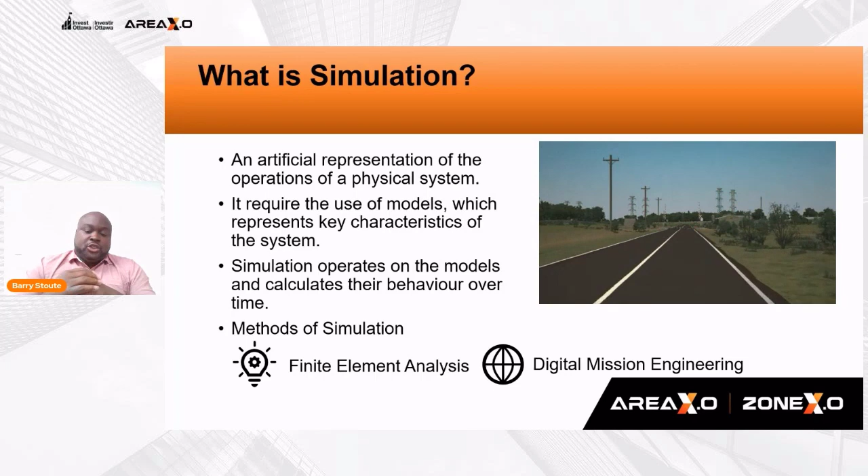So what is finite element analysis? Finite element analysis, or FEA, is a numerical technique to solve physics models. I'll provide a high-level explanation as this area is quite complex.

It starts with a digital model. It could be any model from CAD, such as ANSYS SpaceClaim, AutoCAD 360, Fusion 360, SolidWorks, and so forth. And it's paired with a numerical solver, which in this case will be ANSYS.

The numerical solver solves for several inputs, such as boundary conditions, initial conditions, and environmental conditions—anything you put as constraints into the model. Then the two are computed, and the computer solves the equations and outputs the data.

Finite element analysis solves for mechanical structures, thermal analysis, electronics, and optical. You're asking yourself, so why is it called finite element analysis?

Finite element really means that we're taking a model, let's say this patch antenna, and creating a mesh of it, breaking it down into different elements. Each of the elements is solved into a large matrix—it could be thousands or tens of thousands of rows and columns. Therefore, this is called finite element analysis.

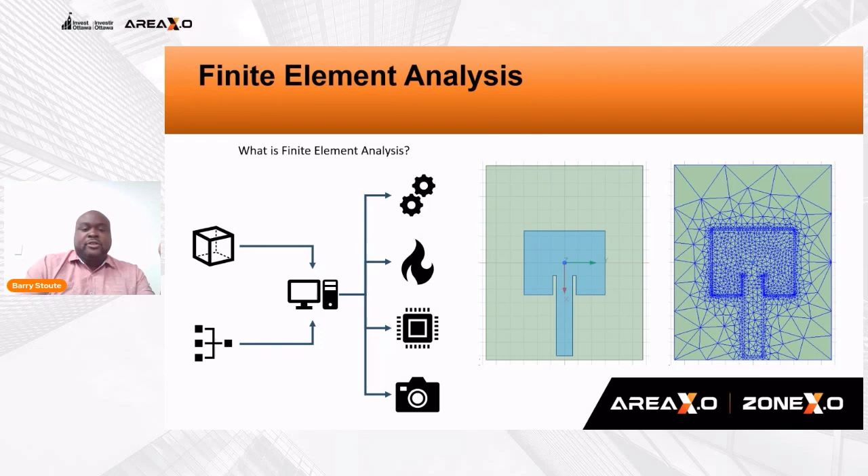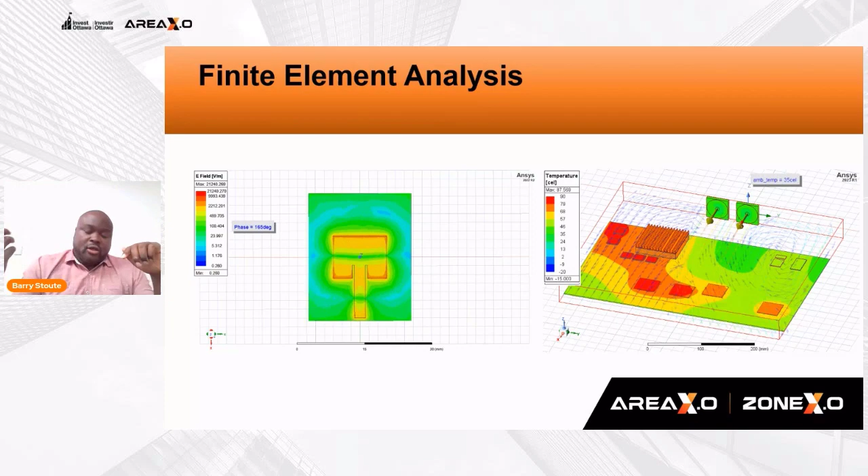After the finite element analysis software finishes running, the results are illustrated for engineers to analyze the behavior of the system. The illustration could be two-dimensional, like this electromagnetic radiation result from this patch antenna, or from the thermal analysis of this server, which is three-dimensional.

Next, we're going to go into digital mission engineering, or simulation that does systems of systems. In digital mission engineering, we start by having an engineer think about a scenario anywhere around the world. Thereafter, he puts in his asset, which could be a drone, a satellite, a car, an aircraft, or anything like that. For our purpose, we'll put in the drone.

This asset will perform duties like intelligence gathering, and will spy over or interact with an aircraft, a boat, a car—but it doesn't have to be adversarial. It could be a piece of land or a city. That asset will also have some allies in this case.

It could be a SATCOM to communicate its data, and a ground station. Now, this is just a unique scenario. It could be any scenario that the digital mission engineer wants, as long as it's grounded in real-world aspects.

Moving on, so we have our scenario. Then the simulation engineer will put in the inputs, such as time of day, route, sensor types, and so forth. The output will be data. That data comes to the engineer, who analyzes it to make sure it makes sense—not just common sense, but also physics and scientific sense.

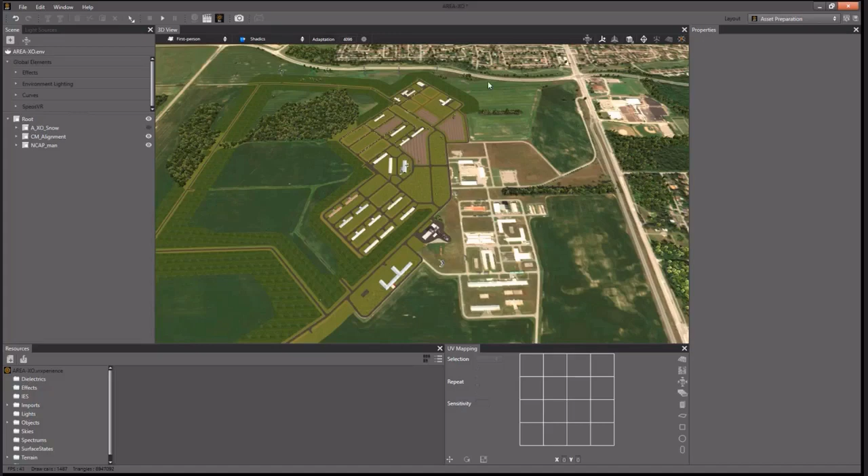What we have done at AreaX.O is digitized the entire site into the ANSYS platform. Right over here, you can kind of see what this looks like. The model includes our entire site with all of its different zones, as well as the infrastructure. Zooming in, we're able to see a lot of the finer details that are included in this model.

We have our main building where most of our staff is located, as well as all the traffic signs, nature, and other infrastructure that has been set up, as well as the farms. This digital twin also includes the infrastructure embedded into our smart city zone.

This includes a multitude of sensors, which have optical cameras, roadside units. Right over here, we also have some thermal cameras, as well as LiDAR cameras. These sensors, as well as multiple more, are embedded into our site where they're physically located to mimic the real-world scenarios in the simulation before we actually go to conduct our tests.

As we were mentioning, the site is extensive, including all the road markings and other small features, as well as our railway crossing. So that can be also observed here. And we're able to simulate the arms moving down and up as would be normal in our typical use case.

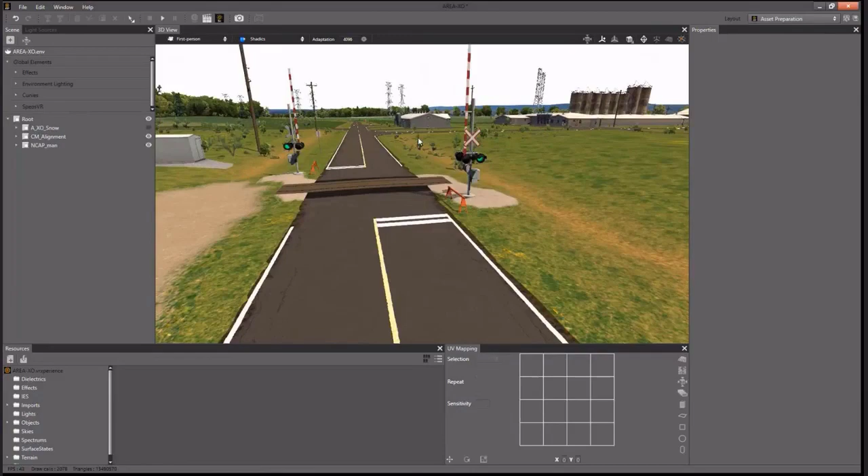In addition to this, the model has also been allowed for easy adjustment of different weather conditions, which includes fog as well as snow, which is one of my personal favorites. Here we'll give you a teaser of what that looks like. So yeah, it allows you to test in different weather and lighting conditions, at night, day, you name it, without actually having to wait for those scenarios in real life.

Now that we have a decent idea of the environment that we're simulating in, we can move on to defining the sensors on our vehicles. So the different sensors that we are able to simulate are shown here. We're able to simulate cameras, LiDARs, including flash and rotating, as well as radars.

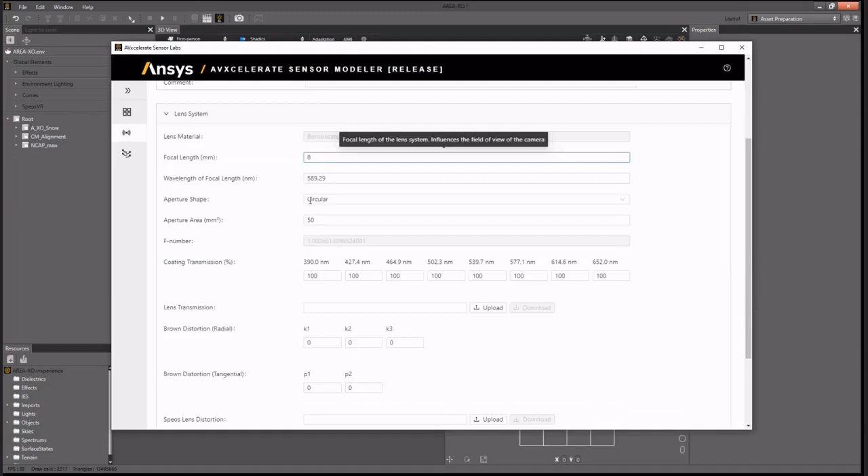For a quick demo, I'm only going to be presenting the data from the camera, because the LiDAR and radar require additional interpretation. When we go to define our camera, we're able to define all of its physical properties as shown here, and all of this results, it allows for the ANSYS simulation platform to compute the physics behind what is going on.

So once we have our sensor defined for whatever we chose, we're able to define our test vehicle and define where the camera or other sensor is located on the car. For this demo, we'll just use a demo car, just the Lexus, and the camera is going to be located right at the front of the car. Not the most realistic, but this will let us have a good and clear view of what's going on in the environment.

So once we have our car defined as well as the sensors on the vehicle, we are able to move on to choosing a car simulator. Currently, we support a lot of different software. We're able to run simulations using IPG CarMaker, Carla, and also using Webots.

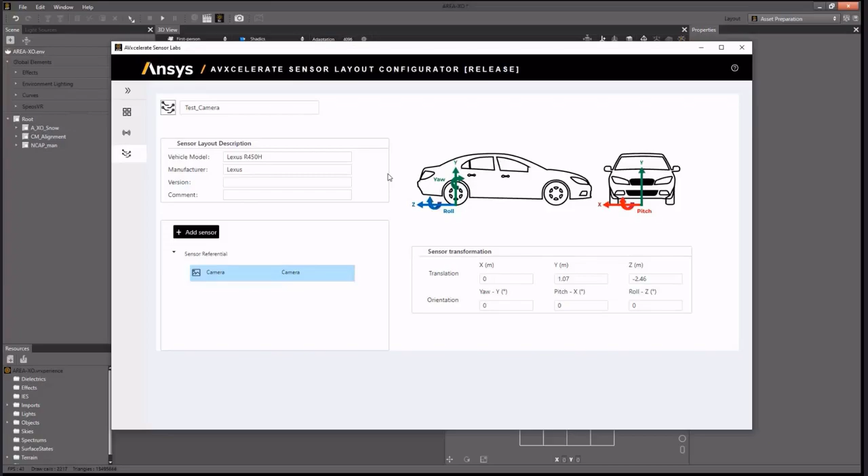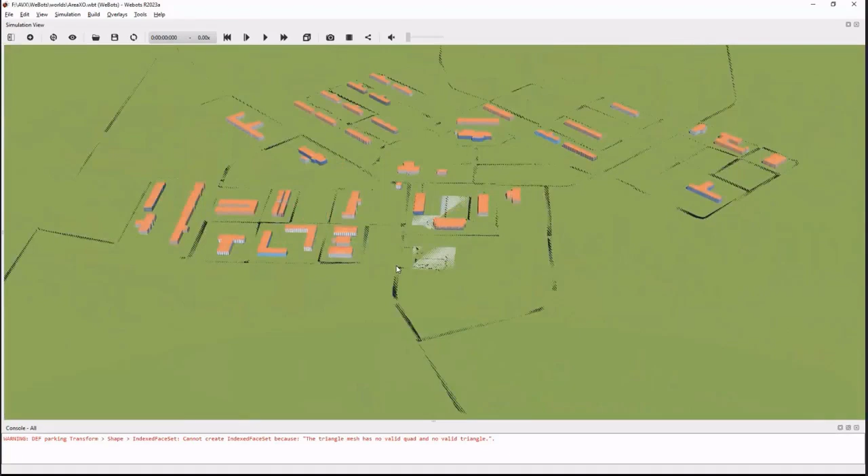So this is a look at the program we're going to be using to co-simulate with ANSYS AVX called Webots. We have another copy of the AreaXO site imported into this platform, but as you can already tell, it is nowhere close to as accurate as our ANSYS model. This model includes basic buildings and some of the roads, although they're not all exactly accurate.

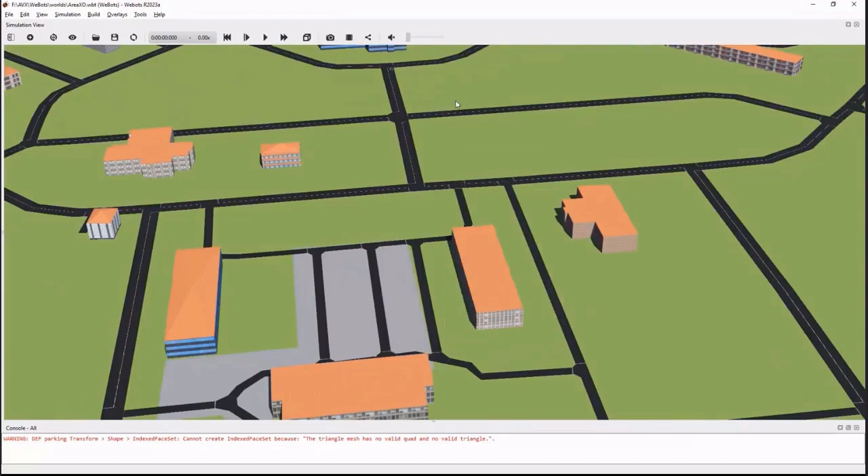So in order to do a demo, what we're going to do is simulate a car driving on this site and connect it with ANSYS AVX in order to get a practical demo. We'll start right here, looking at our main building.

So let's do that. There you go. Yep, so it's going to show up to tell the connector what's going on. Oops, sorry about that. And let me just get this aligned so that we're ready for when the simulator is running.

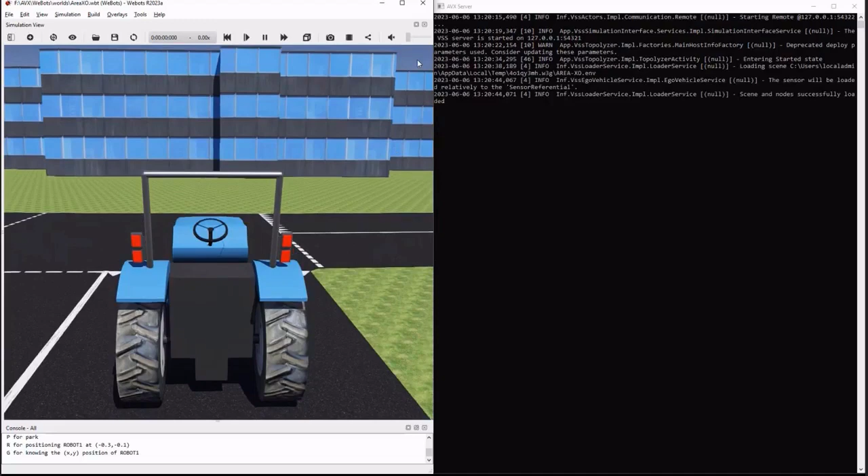Okay, so while we're waiting for the simulator to set up, I'll give you a little more detail into what's going on here. So with Webots, you can define your vehicle, including its suspension, wheel model, the powertrain on it, and other features to define the vehicle dynamics of the car.

We already defined the sensors that are attached to this vehicle in the AVX platform. So once we have all of that defined, the Webots simulation tells us how the vehicle is going to move, and we're able to control it, telling the vehicle where to go, and also program autonomous driving algorithms. These scripts can be input directly into Webots to tell the vehicle how to respond when it detects certain objects, and these scripts can be written in Python or C.

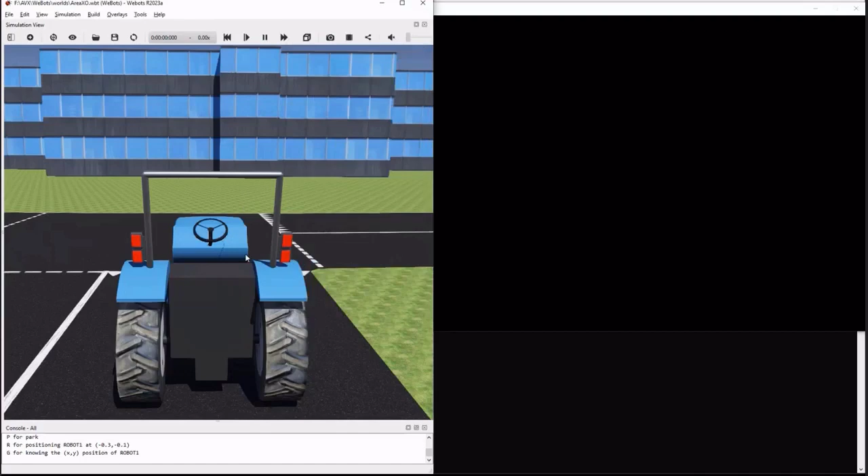I'll give it a little longer here while we're waiting for AVX to load up. But once it does, what you'll be able to see is that the exact position of the vehicle is going to show us the view of what the digital twin looks like in the AVX environment. And oh, there it is. So yeah, here you're able to see we're able to transfer everything right over.

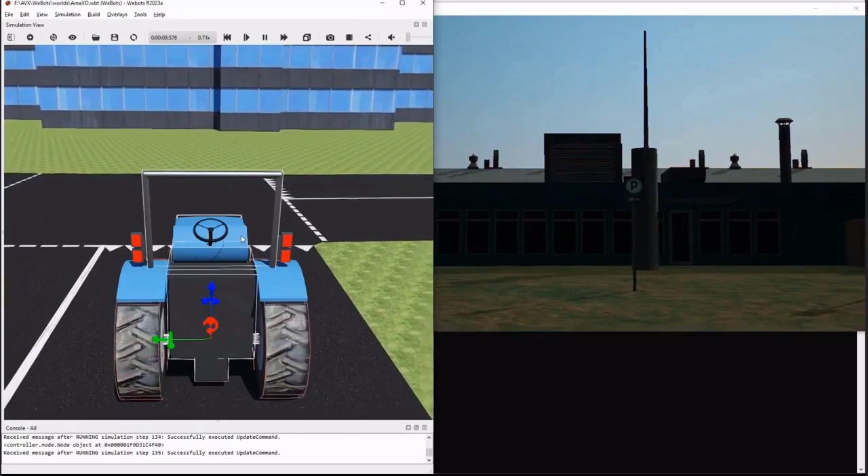I'm going to move the car a bit, and you can see the digital twin also moves pretty much the same way. Okay, so we're going to drive along the track to show you that everything works out. Right now it's a little difficult to drive using the keyboard, but you can see it works pretty well.

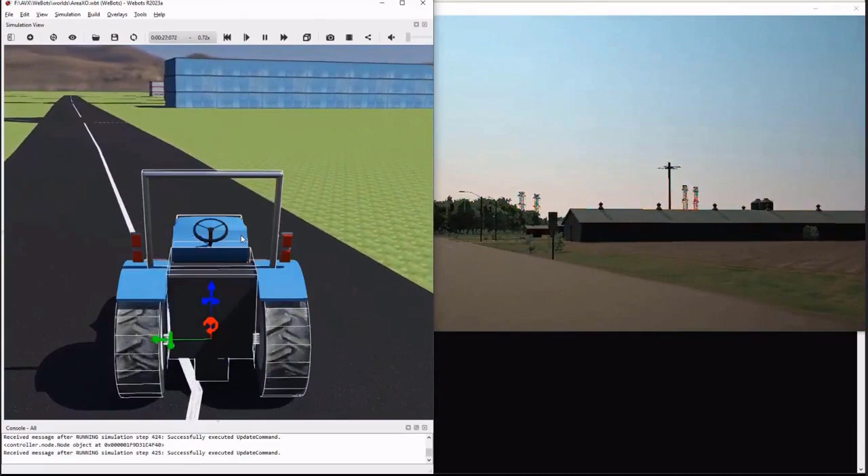So Webots is only here to define the position and the orientation of the vehicle, but what we really care about and want to focus on is the AVX, right? So let me move this out of the way so we can actually look at that. Yeah, it's right here.

So now you can see we're able to control our vehicle and drive it as we please. And this is where the different autonomous driving algorithms come in. You're able to program so that the vehicle can either turn, speed up, or slow down as you wish based on what it sees in this environment.

For this example, we've included just an optical camera, but as was shown, we are also able to include radar as well as flash and rotating LiDAR sensors. All of this data is available to the autonomous driving algorithm to determine the best course of action.

You can see as we pull up to the intersection, all of the different sensors embedded in this environment are all visible in this model. We're able to stop at the intersection, and that kind of demonstrates what we're able to do with this model.

In this tutorial, I'm going to go over STK and what that allows us to do with ANSYS. So STK is a systems toolkit, and it lets us simulate air and space missions. It's a digital mission engineering tool, so this allows us to model drones, aircraft, satellites, etc. - anything moving large distances over large time.

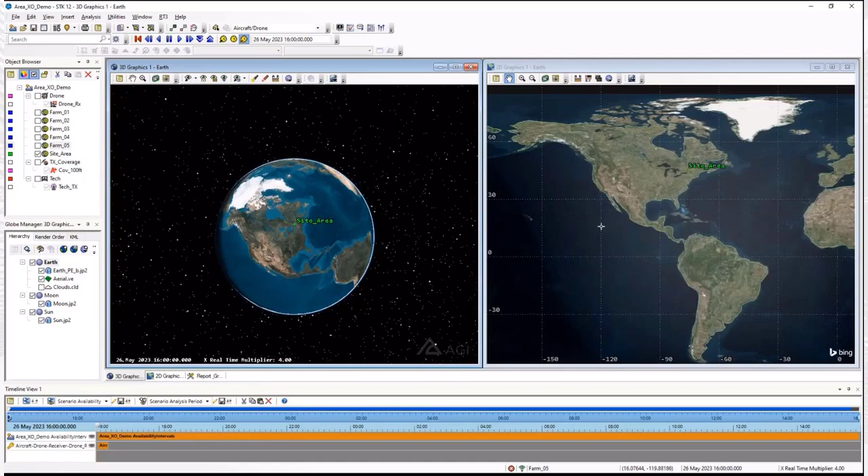So here you can see there's two views. We have the 3D view as well as the 2D view of the Earth, right? So we'll zoom in here and you'll kind of see the area that we have defined as our site. Right around here we have the Area XO site, and I'll zoom in the 2D view as well, just so we're all on the same page.

Yeah. Yeah, you can kind of see same area on both. That's okay.

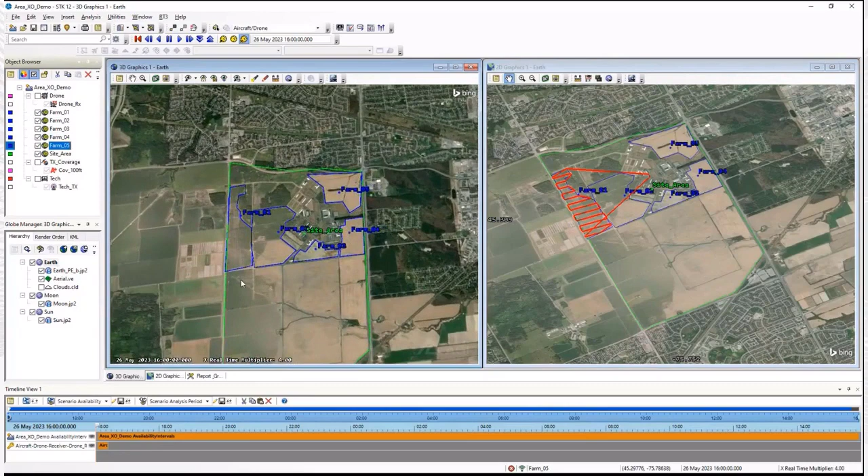So first thing we did is kind of define the different targeted areas, right? So as I'm sure you might know, Area XO has a lot of experimental farms in our area. Monitoring these farms would be very labor and time intensive, so the use of drones to scan the fields regularly to provide a detailed update of crop growth and status is very helpful. So the mission we're going to simulate is a drone leaving our main office around here and going to scan one of these fields. So the first thing we wanted to define is some ground station, right?

Then we can start defining our drone. So over here, you'll kind of see the setup of what's going on. So in STK, we're able to choose various different drones. You can see we're able to capture airliners, business jets, fighters, helicopters, and so forth. These models are not limited to small drone applications and can be extended to large-scale practical aircraft or even satellites. So for this demo, we're using a quadcopter. So this is going to be a rotorcraft, and here we can kind of see the different models.

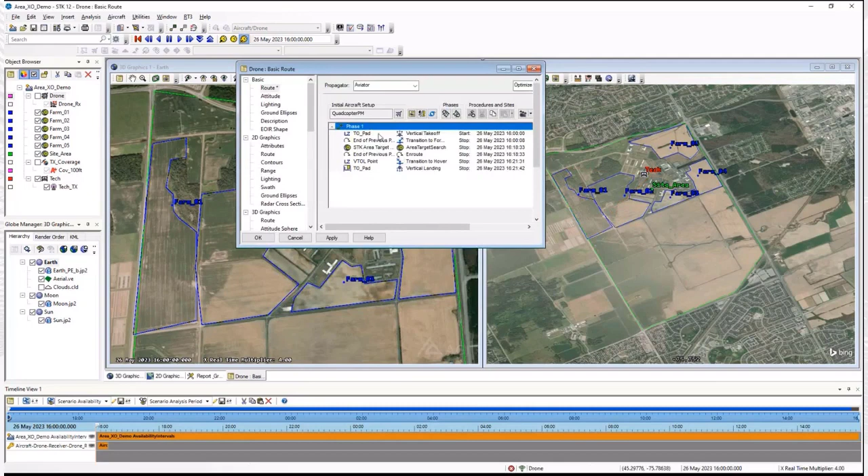So we're able to define the performance of our drone. So the max altitude, different dynamic rates that it's able to maneuver at, as well as safe and transition airspeeds for the aircraft. We also define the rotor size as well as blades, and this allows STK to compute the aerodynamic performance of our vehicle. So if we fill out all the corresponding information, we end up with a very accurate model of a drone that reflects its actual performance. Right here, STK is kind of calculating all the stuff, so we'll give it a second to get its work done. Okay, awesome.

Moving on, so once we've defined our aircraft, we then proceed to defining the mission. So as we said, for this scenario, we're going to take off very close to our ground station, right? That's our ground vehicle that we set up antennas from, and then the pilot exits and deploys this drone. The drone is first going to take off from that takeoff pad. Then it's going to transition into forward flight. And over here we can see transition to forward flight. Yep. And then it's going to proceed to, we'll choose farm 1, right? That's the biggest one, probably take the most power to scan.

So once it reaches this area, we're able to define the altitude as well as the density with which it should scan this field. So we've set a 400 feet separation between passes, and it's going to try to scan this field, maintaining this distance of separation. Okay, apply this. And at the end of the mission, we're going to return to the takeoff location, transition to hover, and then land on the pad, right?

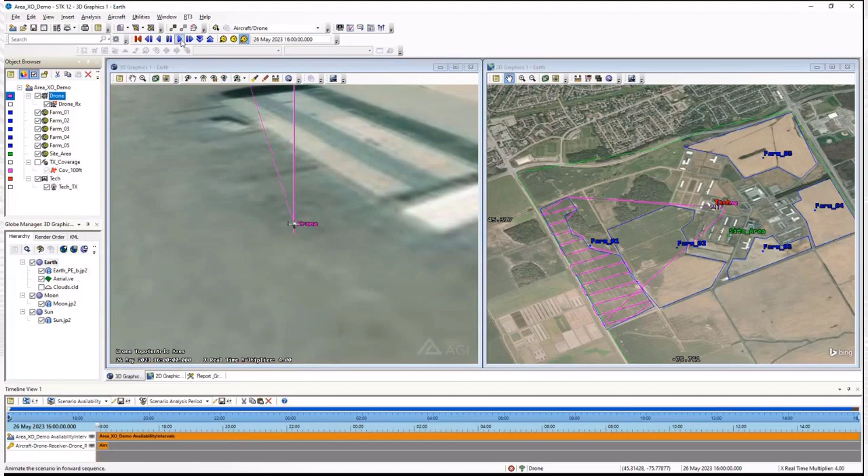And yeah. There we go. Zoom to. So this kind of lets you see the drone, right? So you can simulate and see what exactly the drone is doing for the entire flight.

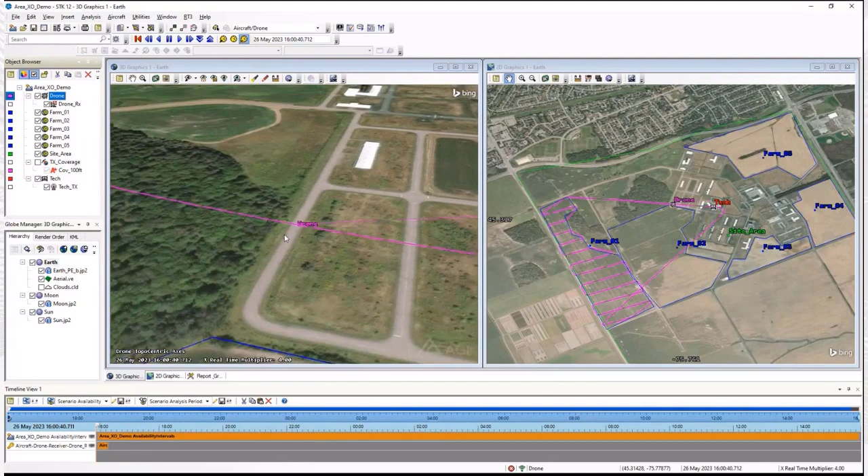So as we saw earlier, the drone takes off vertically from the launch pad. Then it starts on the trajectory. We are going to speed it up a little bit since it takes a while. But you can see the drone conducts this trajectory to scan over the entire field, maintaining that distance of separation that we specified, right? And then at the end of this, it goes back and lands, right?

So that concludes the mission, and we were able to verify that, okay, yeah, it does indeed scan the entire area, and there's no obstructions or anything that we need to worry about. So we'll stop that here for the simulation. Yeah, so that's the flight planning portion of using STK.

Now, beyond just planning for the flight, we still need to determine whether this trajectory is feasible for the drone. In order to do this, we can go into the report and graph manager. So here we're able to get a lot of information about the flight. A lot of these contexts are very specific to space application, but for our sample here, what we want to know is the flight profile and the power consumption over this flight. This will allow us to determine whether the flight is feasible or not.

So let's take slightly larger time steps so we can work with this faster. What we're able to do then is take this data and plot it to visualize the data and determine whether it meets our necessary mission. I was kind of checking this out earlier, so you'll be able to see that it's set up. But yeah, so here you can see that we have the power needed for each time, and I'm calculating the energy consumed based on that.

We have a battery, 3-cell, 10 amp hour battery, and we're able to verify that indeed the flight takes about this much energy. The flight is concluded right around here. We're looking at about 20 minutes. And the flight does not need more energy than the battery can provide. So this allows you to verify whether your trajectories are feasible.

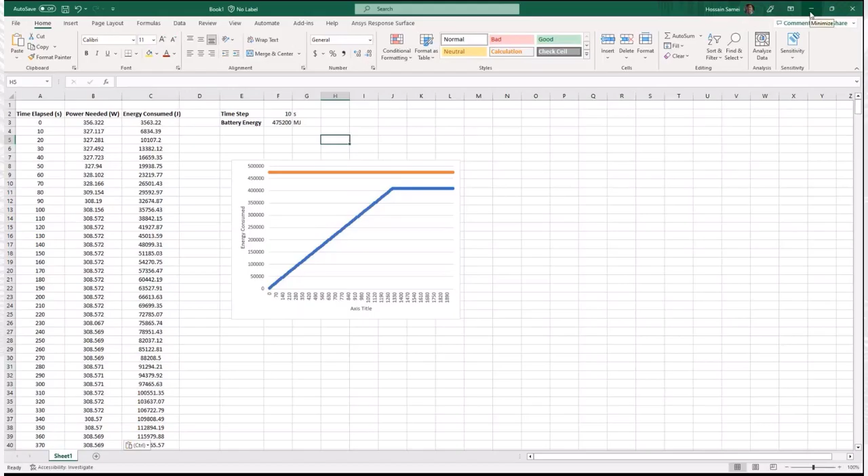Okay, awesome. Now, the other great thing about STK is you're able to modify the trajectories with relative ease. So let me do that. Let's say, for example, for the max separation distance, instead of 400 feet, we wanted something a little more dense, so around 200. We're able to set this option, apply, and STK will recalculate the trajectory in order to meet the new mission requirements.

Once we hit apply, give STK a minute to compute. Yeah, so you're able to see how these paths are much more densely packed. This allows for a much lower distance of separation and a more dense scan to get data in very close locations. But such a dense trajectory might not be necessary. That's okay. So that kind of gives you a flavor of what you might be able to do. And you can also modify which farm you want to go to, and STK will again pre-compute everything that you need.

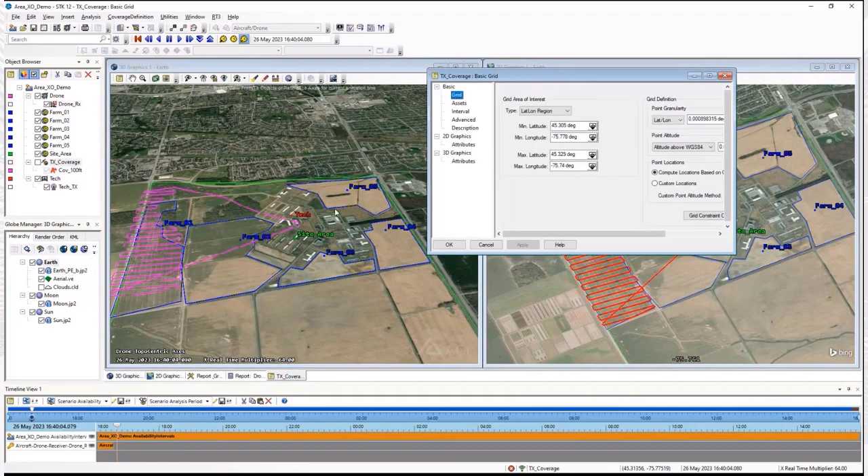So the other thing that is very important when we're doing these simulations is to ensure we maintain a line of communication with our drone at all times. So we've added a receiver onto the drone, specified here, and we were able to define a lot of these special parameters that let you define the physics of what's going on and get a more accurate model. With this, we can plot the transmitter coverage, and this lets us visualize the sensitivity, the connection strength over the area.

Right, so we've defined a grid pretty much covering the site. So I'll click OK. That's fine, and we then define a figure of merit test. So this plots the bitrate to noise ratio over the area, right? And that's all we're saying here is we want to do access constraint and plot the signal to noise ratio.

Okay, and then let's plot it. So while it's loading, I'll talk through what's going on. This allows us to verify the signal strength at different locations during our trajectory. We can use this to identify locations where it might be necessary to take additional steps to ensure proper communication.

So here we can see what's going on, right? Of course, the signal strength is strongest right around where we have our communication tower, and drops off the further we go. And we can see the minimum connection strength required for communication with this transmitter and receiver setup was 50 dBm.

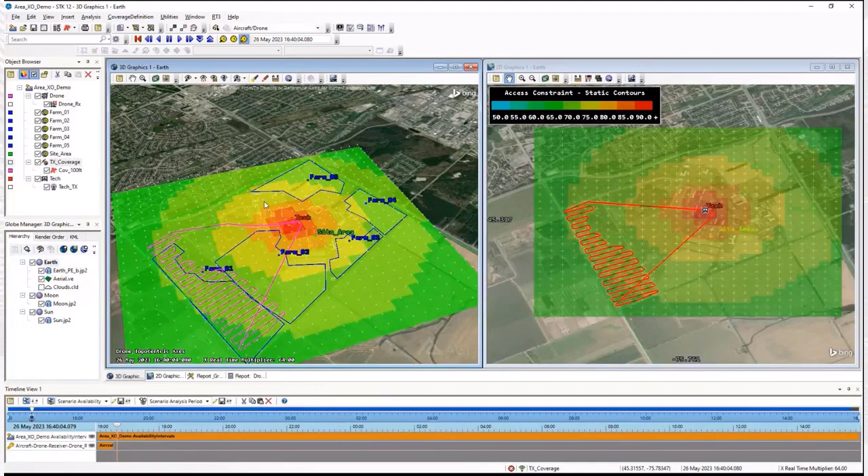Okay, moving on, we're going to go to the ANSYS Electronics Desktop, which is the ANSYS platform for simulating anything to do with electronics. This can go from radios to radars to electric motors to printed circuit boards, you name it. All of these systems and much more can be simulated in this environment.

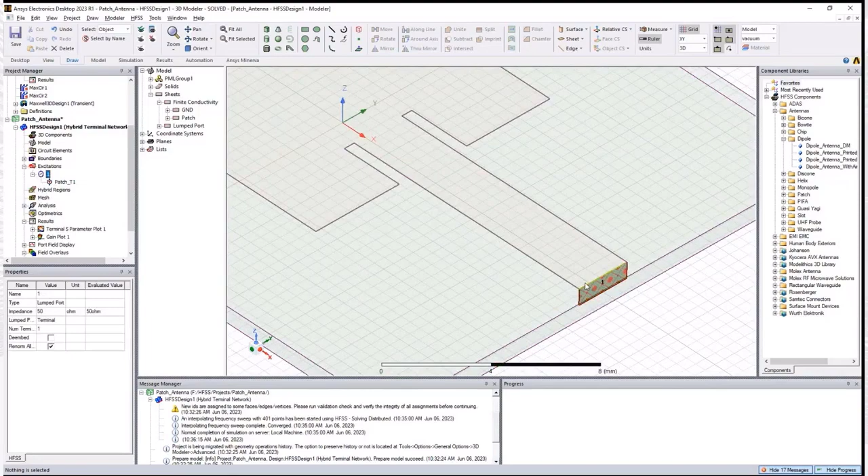So to show you an example of what we can do, I have a very simple patch antenna here. You can see we drew up the model. We are going to define an excitation, right? So we're going to electronically excite this edge, right over there of this antenna. It's just on a PCB, we have a layer shaped like this, and then a ground plane at the bottom.

After exciting this antenna, we're able to study the electromagnetic fields emanating from this body, as well as its strength, how well it's able to radiate, and its far field data to get a rough idea of which direction it's better at radiating than others, right? So we define the spectrums we want to analyze, and the first thing I want to go over is here.

The terminal S parameter is typically used to identify the frequency for which the antenna is best suited. Here we can see that the antenna is best suited right around here; actually, we can add a marker. And right about here, we can see about 10.05 gigahertz. So that's the frequency that this antenna is going to work best at, where it's able to best radiate its energy.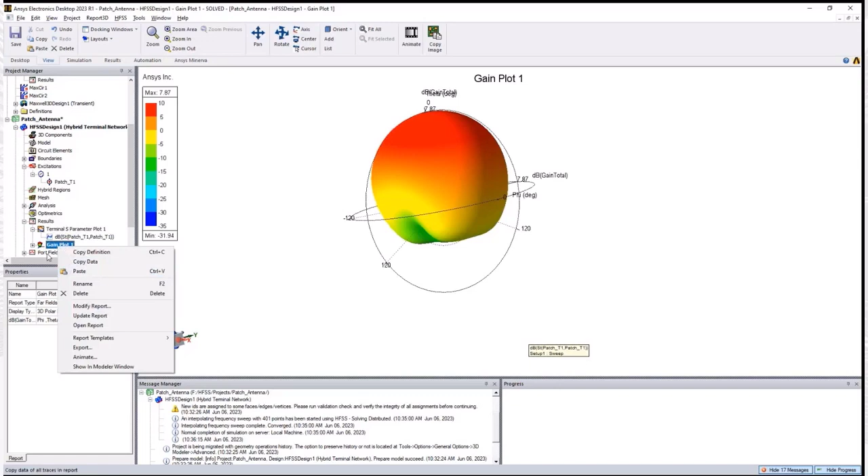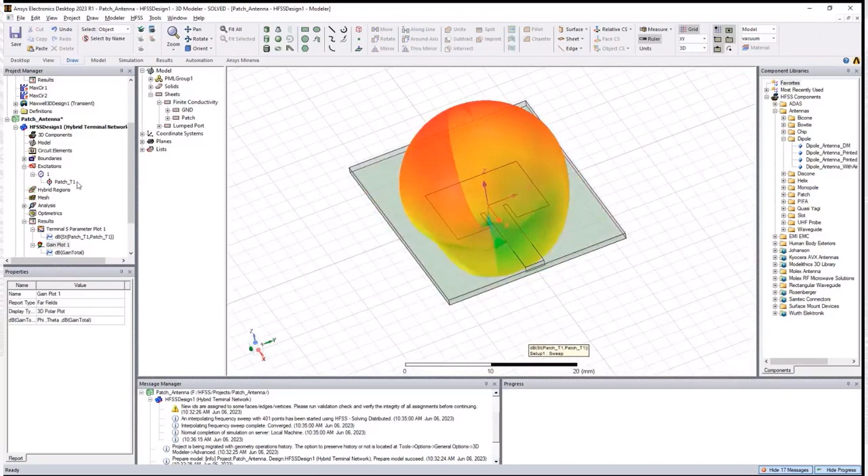We can overlay this onto the model here. Let's see. Yeah, showing model window. So here we were able to visualize how exactly that looks on my antenna, right? As expected, it's strongest in the direction that it's facing. The opposite direction has a weaker signal strength as well as some holes. Okay, we'll clean that out again so it's not cluttering our view.

The other thing we can do is visualize the electric fields as they're emitted from this face. I'll move us to a clean view, and there you go. Kind of stole my thunder. But so we're able to plot the electric fields on this face. We can also animate. So, dun-dun-dun. Okay.

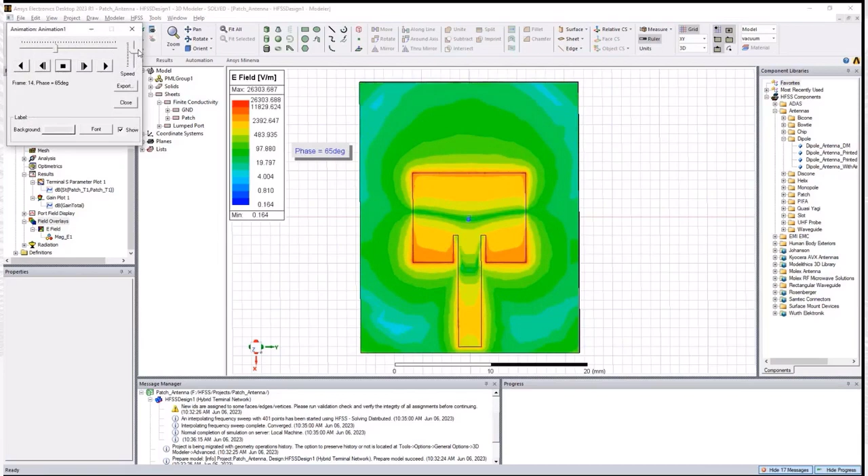So we're able to see how the electromagnetic waves are carried through this antenna and their respective signal strengths as they're emitted. So this is a very useful tool to not only get the performance of antennas, but also visualize where its deficiencies and strengths are so we can use it to modify different designs. HFSS also has a lot of built-in tools to optimize the design of these antennas. Okay.

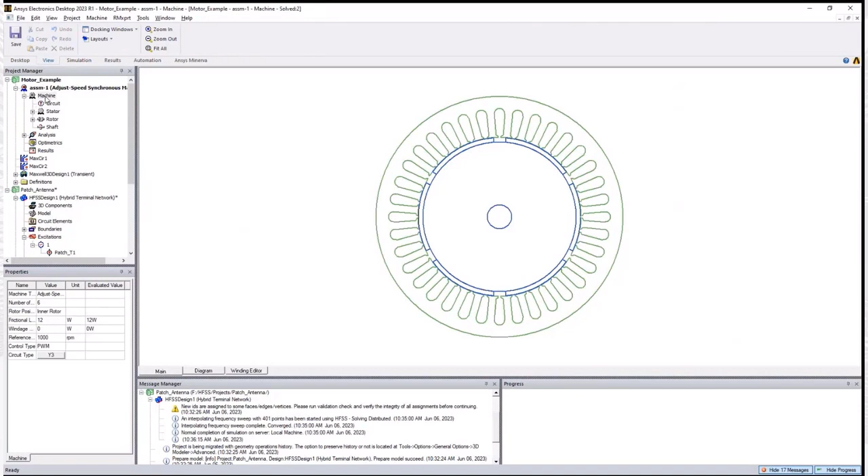Another example I want to go over is this. So electric motors, we've seen a lot of work on, and ANSYS also provides a simulator for these platforms. So there's a simple kind of dialog box version of this and also the extensive 3D model. We'll go over the simpler version first. Here you can define the number of poles, where the rotor is fixed, and then give it some losses to kind of define what the machine does.

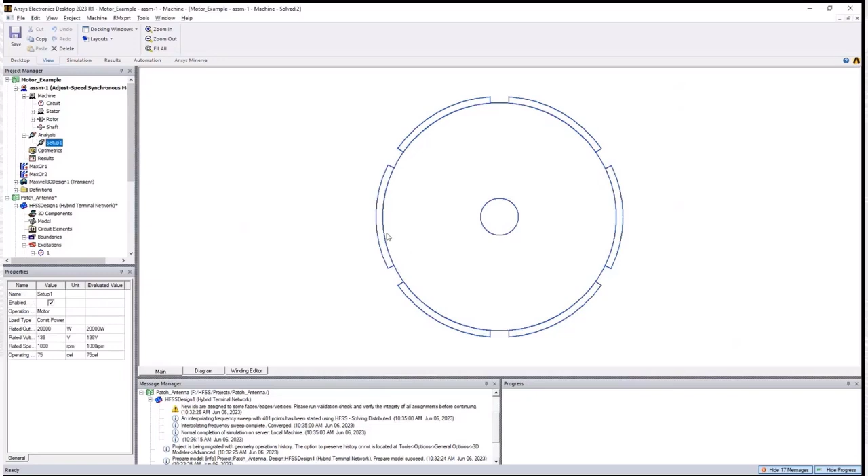You define the diameters as well as the material that is used for the windings. And probably around here, you define what the rotor is as well. And if you define all these parameters that you know if you're designing the motor, you're able to analyze the motor and get an idea of its performance.

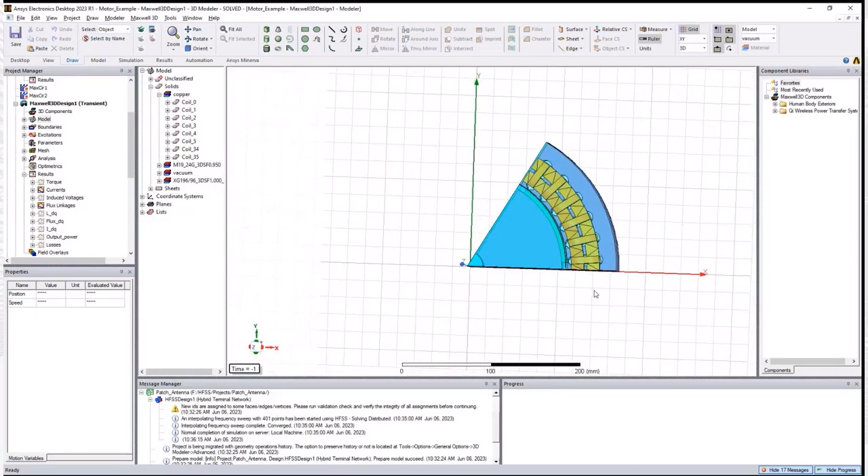Wait, wrong file. Here it is. So here's kind of a visualization of what that looks like, right? So here we have a motor. I've only done about 1/8 of the motor. And you can see each of the windings are right around here, if I can click it. So this is only the top half. You could have a similar bottom half to the motor, and you can see those are the windings.

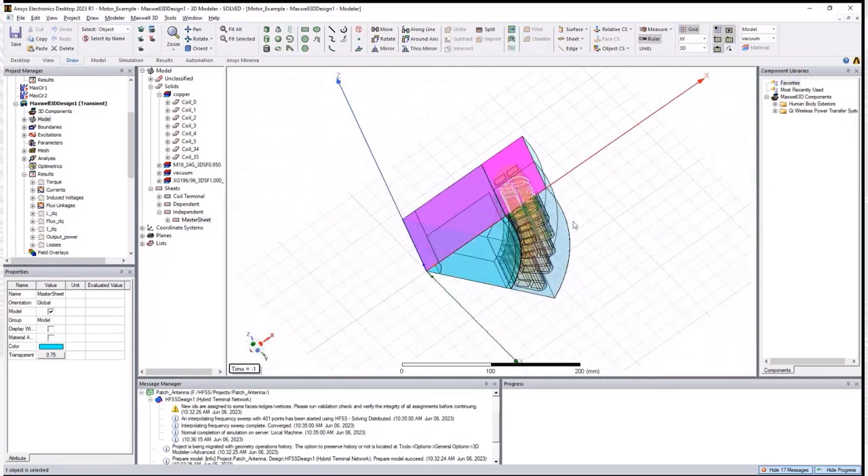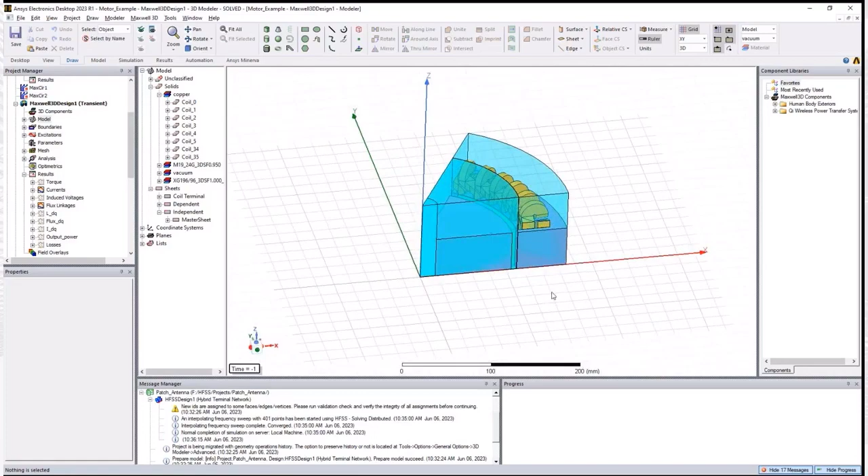You have the outer ring. If I can click it, we can kind of see it. The dark blue area here that includes the permanent magnets, and this is the inner rotor where that's the one that's moving. So simulating the electromagnetics based on the materials that you define, the dimensions of everything, as well as just the electromagnetic coupling that allows you to have a motor.

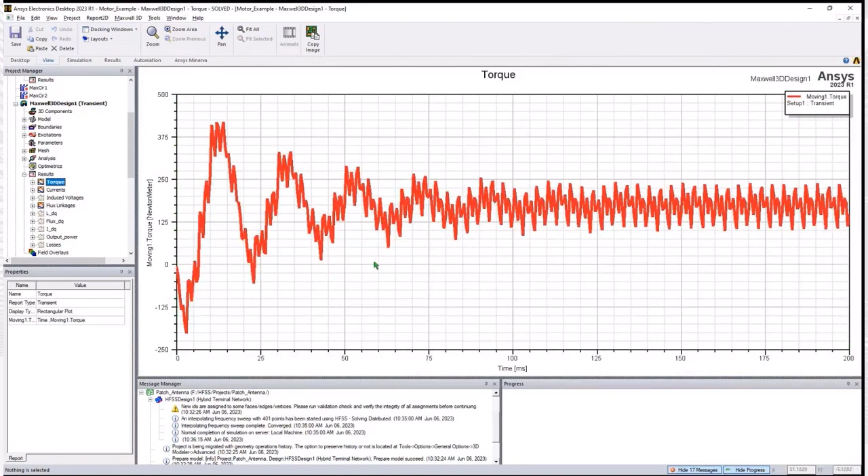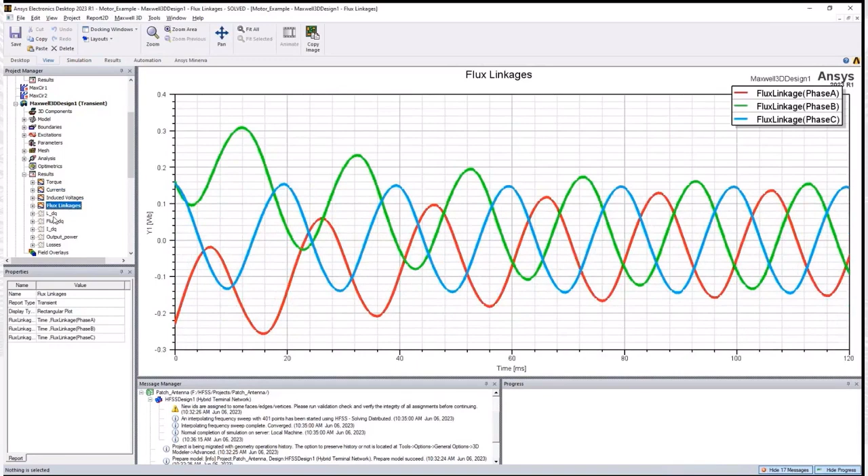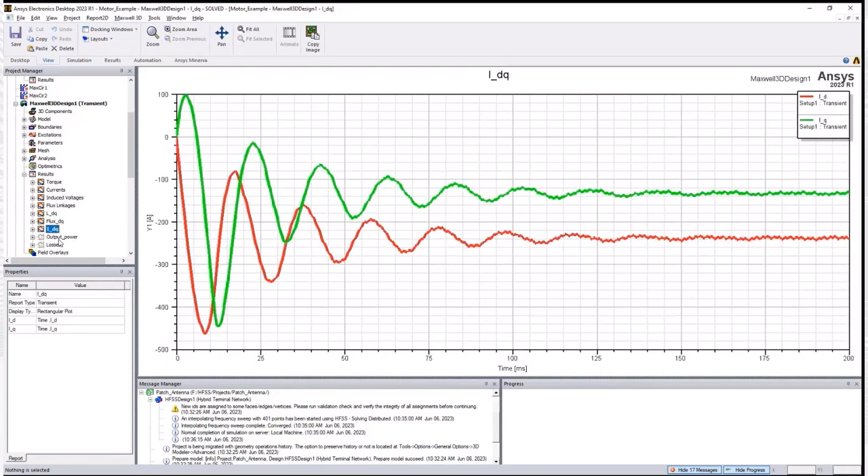We're able to get the torques from the system as you simulate it from startup, the corresponding currents in each of the 3 phases, right? Induced voltages, the flux, power flux, and magnetic field strength, and so on. We're able to compute all this information and predict the performance to simulate the electric motor, as well as output power and losses. So this is another application using the Electronics Desktop, where we're able to simulate electromechanical components to determine their performance before we even make it, and even optimize our design.

Hey guys, thanks Sammy for walking us through those demonstrations. That was amazing. So it's remarkable to see how far we've come from a simulation standpoint, and to see some of our real world assets in different situations, and the variables and the components that you can take a look at to pull new data sources and view the results of the simulation. It's remarkable for sure. We're now going to get into a little bit of Q&A. Excited to hear these guys answer some of these questions.

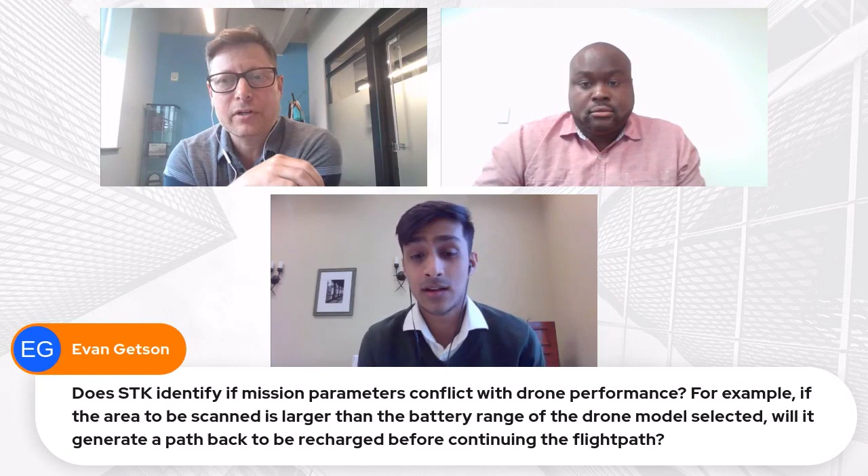Thank you. Evan's got a bit of a two-parter here. So does STK identify if mission parameters conflict with drone performance? And then as an example, if the area to be scanned is larger than the battery range of the drone model selected, will it generate a path back to be recharged before continuing the flight path? Short answer is no, because STK does not have that ability yet. I don't know yet. So we have to go consult with the ANSYS application engineers.

But what we can do is as engineers, Sammy and I, we could actually do the simulation, and if we see that it will run out of battery, then we'll actually modify the scenario such that we'll have a two-part. So we'll fly, let's say, half the path, come back, recharge, and then we'll fly again for the other half of the path. So again, even though STK can't do it at this point, we can do it with our modified software. Got it.

Another question here. Can the simulation be applied to other industries besides smart mobility? Absolutely. It applies to everywhere. It applies to the aerospace industry, space industry, energy, defense, you name it, anything that deals with engineering or science, simulation could actually be applied. Got it. Hay has a question here. Can the platform access ANSYS CFD as well? Okay, so for those who don't know, CFD means computational fluid dynamics. At this point, it's only Icepak for now. ANSYS Icepak. Got it.